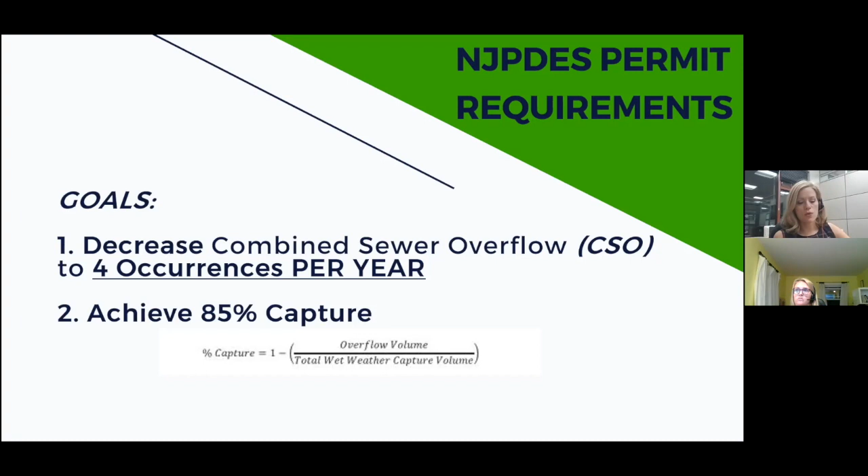The city's obligations in achieving those goals is to evaluate alternatives including green infrastructure - infrastructure that is environmentally friendly, named green infrastructure because it's able to treat stormwater runoff on site. It does not rely on piping networks that discharge stormwater runoff to the river.

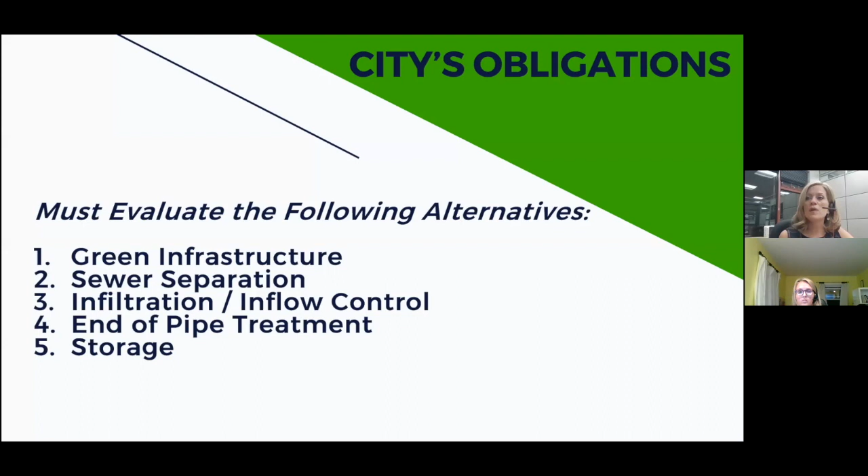Green infrastructure is something that the state of New Jersey is very strongly advocating for, because that would also help alleviate the rising sea levels and the climate change that we are witnessing. Sewer separation is another alternative, along with infiltration, inflow control, end of pipe treatment at the outfalls, and storage.

Now, the city of Hackensack sewer system areas - if you can see my cursor, these are the city limits of the city of Hackensack, and obviously the river is on the east side. The areas not highlighted in orange or green are already separated sections of the city. That's not to say there's no flooding there, but they're already separated. The stormwater infrastructure in those sections is connected to a stormwater conveyance system that finds its way to an outfall directly to the river.

Any sanitary sewer conveyed through those areas of the city goes directly to Bergen County Utility Authority, BCUA, for treatment. The areas highlighted in orange and green are the two primary sections that are still operating under a combined sewer system.

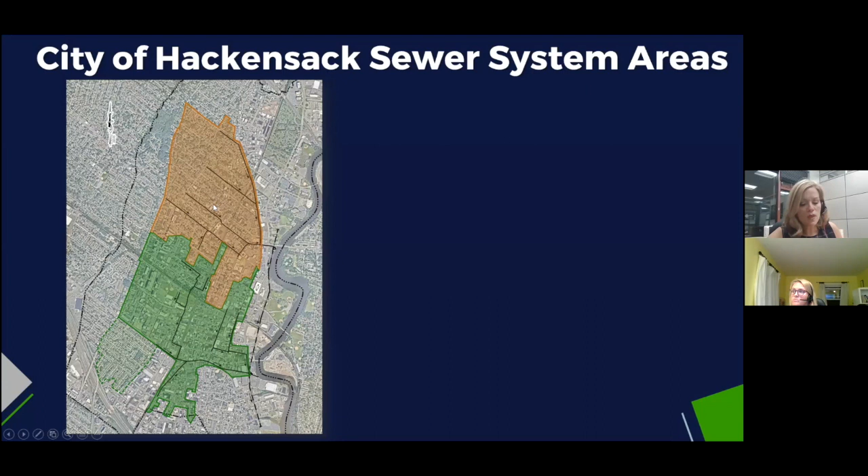The north side of the system is the Anderson Street drainage area, identified because the screening facility along this side is along Anderson Street, hence the term Anderson drainage area. The maximum flow this area captures is 4.9 million gallons a day. Currently we have 52 overflow events documented for 2020. Don't forget, the primary goal is to reduce our overflows to 4 occurrences per year for the entire city of Hackensack limits. Anderson represents 52 overflows alone up until now.

The southern section of the combined sewer system is known as the Court Street drainage area, and to Jim's point, it goes beyond the name of Court Street - it's the entirety of the southern region of the city, capturing pretty much 6.5 million gallons a day, and currently reporting 42 overflow events for 2020.

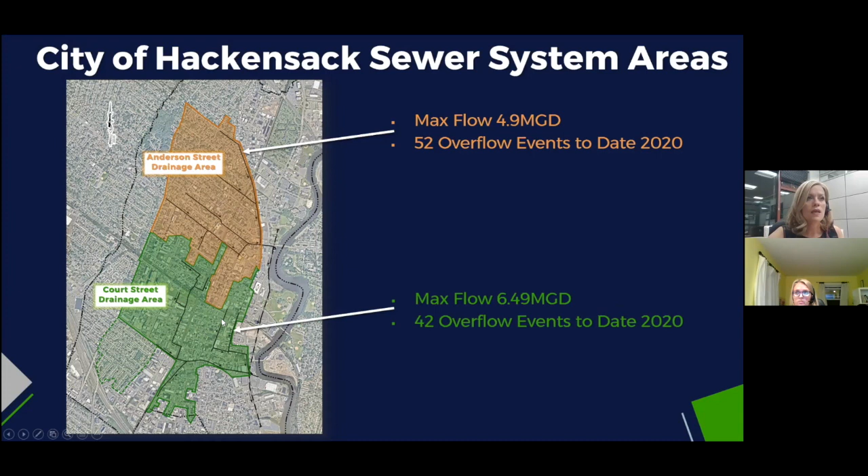Now, the objective of the long-term control plan is to minimize the combined sewer overflows that are being reported at the screening facilities. It is not intended to address flood mitigation. Its main purpose is to look at the current pipe network in the combined sewer system and how to further alleviate the overflows. However, addressing flooding and localized sewer separation efforts will address two things.

One is adding additional storage in the culverts that we are installing throughout the city in those specific areas. And it's also able to slow down the process by storing and delaying any discharge that makes it to the river without having it go through a combined sewer system.

I will now introduce Erin Abline to discuss the technical specifics of how we are outlining how we have come this far with sewer separation efforts, what we have done in 2020, and what we will be doing in future years to capture principal forgiveness. It made sense to discuss the technical backing of how we are outlining these projects to then come back and discuss the financial aspect and benefit to the city, which is also important, and understanding the reason why the projects are outlined the way that they are.

Thanks, Eleni. My name is Erin Abline. Like Eleni stated, I'm the project manager for Suburban for the city's current sewer separation projects. In order to understand the schedule alignment of these projects, I want to go through a high altitude view approach on what we're doing. Most of the city's flooding occurs within the Court Street drainage area, with two major areas.

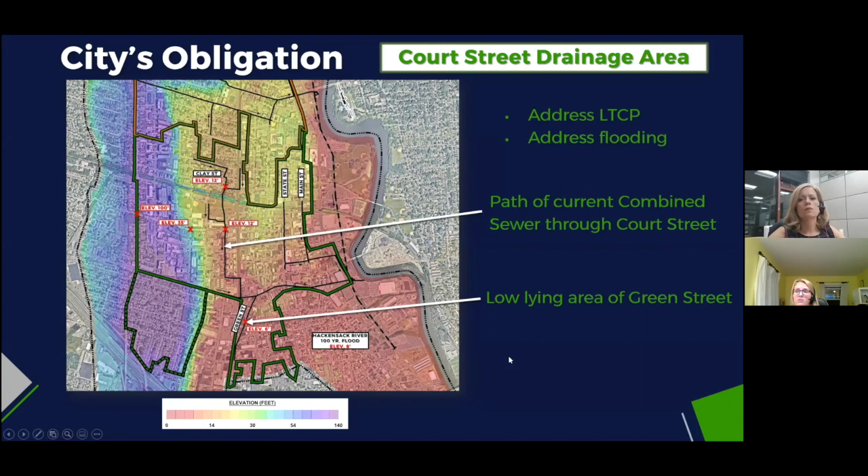To address this flooding, we need to continue efforts like we've seen on Main Street and cut off drainage area that comes towards Green Street. This infrastructure needs to be installed and run perpendicular to the river instead of parallel like you see right now. The next few slides, we're going to talk about the progress we've made so far towards this goal.

How it connects to our 2-year look ahead. First is the Main Street work performed prior to our involvement. The Main Street separation started with 2 projects designed by Boswell Engineering, shown on this map in yellow. The first was the separation efforts contributory to the outfalls behind White Manna. This infrastructure was designed to accommodate about 10 acres of separation, covering Main Street and State Street from Berry to Passaic.

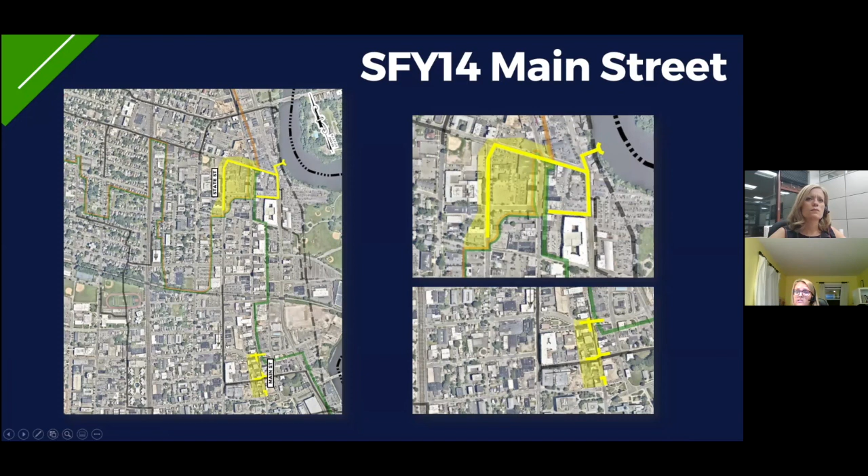The second was the separation efforts within the area of the city's TAP grant, or streetscape, along Main Street from Essex to Atlantic, which was designed to accommodate about 4 acres of separation and provide the conduits across Main Street prior to streetscaping.

Next are the contracts that Suburban designed. We credit the city for recognizing that Main Street played such a critical role in sewer separation and flood alleviation within the Court Street drainage area. You performed your due diligence prior to implementing numerous grants and loans for the Main Street two-way conversion and streetscape. This string of projects together, separation and streetscapes, represent $3 million of grants received by the city, which is substantial. Suburban was authorized to perform these analyses, and we've worked over the last year to implement a program.

With 2 separate contracts, shown here in red. The first contract, labeled Contract A, addressed the area between Atlantic and Mercer Street. This area is about 7.5 acres and is contributory to an existing stormwater system and outfall through the record site. The second contract, labeled Contract B, covers a much larger area of about 26 acres, delineated by Mercer to Berry Street and from State Street to Moore Street.

This contract's drainage area is contributory to a large culvert currently being installed on Camden Street. A culvert is loosely defined as a significant drain under a road or railroad. The culvert installed within Camden, shown here for scale with a person standing next to it, is used for both conveyance and inline storage.

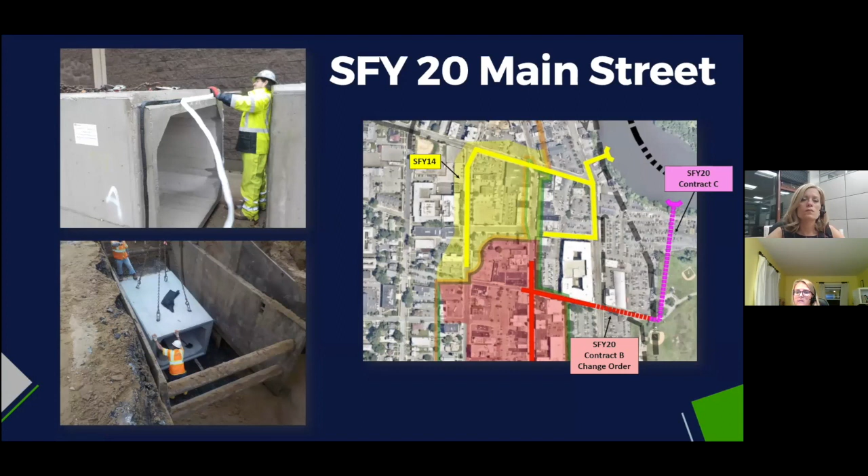I think it's important to note that the work done to date, if you look out here, we've separated about 10% of the stormwater that is contributory to the combined system within the Court Street drainage area. And that's substantial. That's helping Green Street today. That's helping Clay Street today. It's helping all your areas of surcharge already.

So Eleni, if you could just go back one more, I want to highlight why Clay Street is an issue and why it makes sense that it's the next area. There's two rails that intersect, and this creates a bowl, where this water you see in these low-lying areas in red has no way to discharge except for added infrastructure.

That's about 30 additional acres that will go through the Camden culvert. I credit the city for having the foresight to perform this due diligence and analysis to set this up to grab this additional area. After installation, this area for the 25-year storm will be dry, which will also alleviate all of that area going to Green Street.

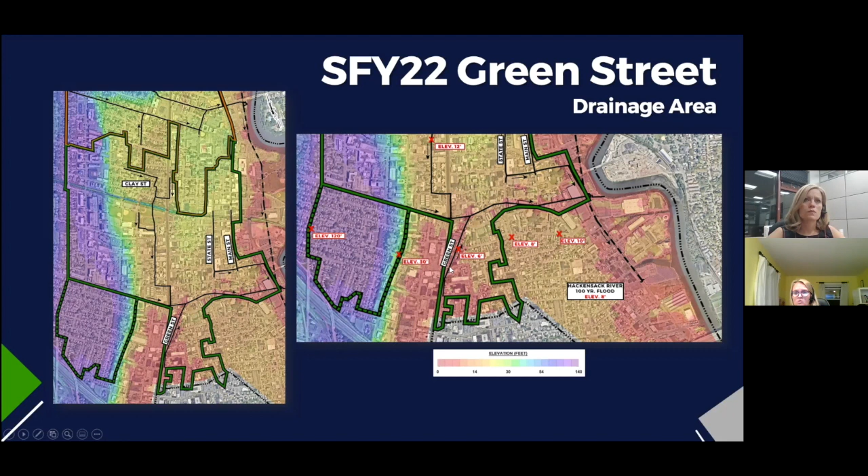So switching gears to the finances of this, I wanted to introduce you to, well, you are fully aware of the New Jersey Water Bank Financing Program, particularly the Clean Water State Revolving Fund. I just wanted to make sure everybody on the council is aware of what that acronym is when we say CWSRF. Clean water is actually the water that needs to be cleaned.

Safe drinking water is safe drinking water. So when we say clean water, it is actually for sanitary and stormwater projects. It is a federal fund source for the Federal Clean Water Act, facilitated through the DEP and financed also through the iBank, the infrastructure bank.

The Main Street sewer separation effort started within the city of Hackensack 5 to 7 years ago. The first principal forgiveness project that the city received was the one we discussed earlier along Main Street, previously designed by Boswell.

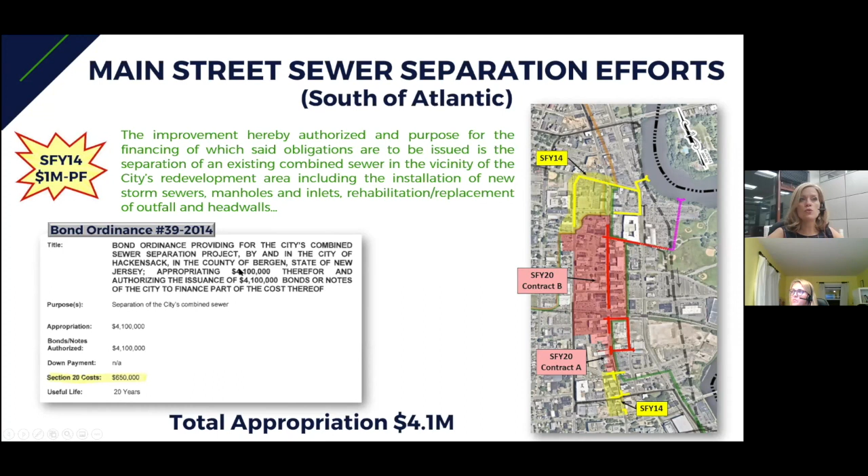So state fiscal year 14, the city received $1 million of principal forgiveness for these project efforts. And the bond ordinance that appropriated funds for that was introduced and adopted in 2014.

Now, since then, through state fiscal year 2020, I wanted to underline that the state fiscal year operates July 1st through June 30th, not a calendar year. The balance of the books that Jim is doing, the reappropriation of funds, the transfers of funds, the year-end budgets end in December for the city and many municipalities in the state of New Jersey. However, the state fiscal year operates July 1st through June 30th.

The reason I say this is because we are already 3 months into state fiscal year 21. So I want to make this distinction when I discuss state fiscal year 2020 for Main Street. That was essentially the project we have constructed and are currently completing along Main Street, state fiscal year 2020, and the cutoff for that was June 30th of this year.

For CSO abatement, the program was offering $1 million of principal forgiveness, and Main Street is aligned with those timelines and regulatory requirements. We are already in the program receiving reimbursements for Main Street sewer separation, and we'll attest to that - we received the first wire transfer just a few days ago. For state fiscal year 20, we have a total of $8 million appropriated for the sewer separation along Main Street.

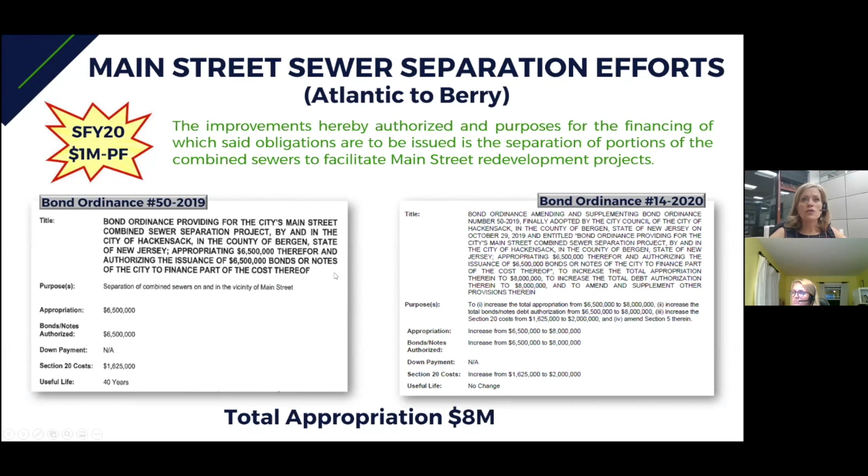The reason I say that is because when we designed the project, we had anticipated that the stretch from Atlantic to Mercer and from Mercer to Berry would be in the tune of $8 million. And that includes the culverts that we have added along Demarest and along Camden.

Now, in doing this and going out to bid during COVID, if you recall, we worked through the first virtual bid solicitations. We had our bid opening in the parking lot with COVID. And it really paid off because the contractors were very competitive in their pricing, and we were able to secure

record low pricing for our project. So even though we appropriated $8 million for just the stretch highlighted here in red, we're in a position where the bids we were assuming would be $4.2 million just for contract B alone. And again, contract B is the one I'm showing you here. Our engineer's cost estimate was $4.2 million, and it is tiny print right now because I wanted to give you a zoom out view of 5 bids that were received.

These bids spanned across $2.5 million to $4.1 million. 4.1 keeps our estimate honest, that is something we would anticipate to see, but due to COVID, the numbers came in lower and lower and lower. The biggest ticket item in contract B was that culvert that Aaron mentioned along Camden. It took a lot of planning and hydraulic analysis to identify what size culvert we would need to facilitate the proper storage and conveyance of stormwater that would be able to capture more from upstream locations.

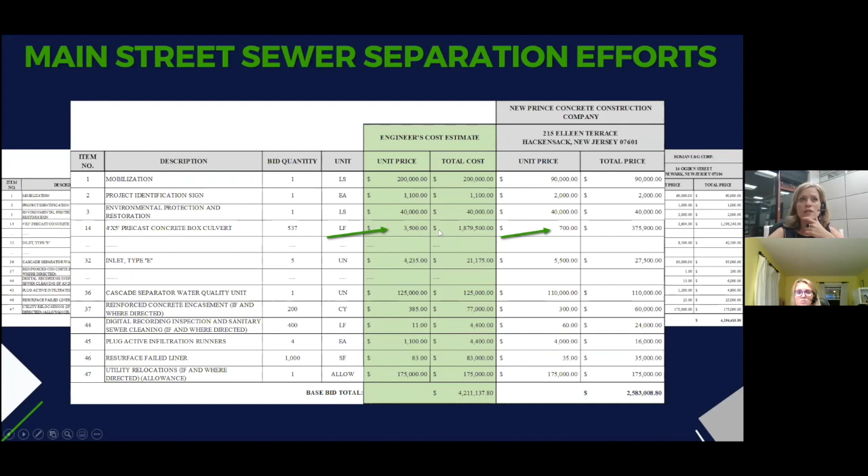Our engineer's estimate was $3,500 a linear foot. The apparent low bidder had $700 a linear foot. That is a significant price savings. And every other contractor that came in, their prices varied tremendously across the board, as much as $2,600 a linear foot. So if we have an apparent low bidder going at $2.5 million, it behooves the city to take advantage

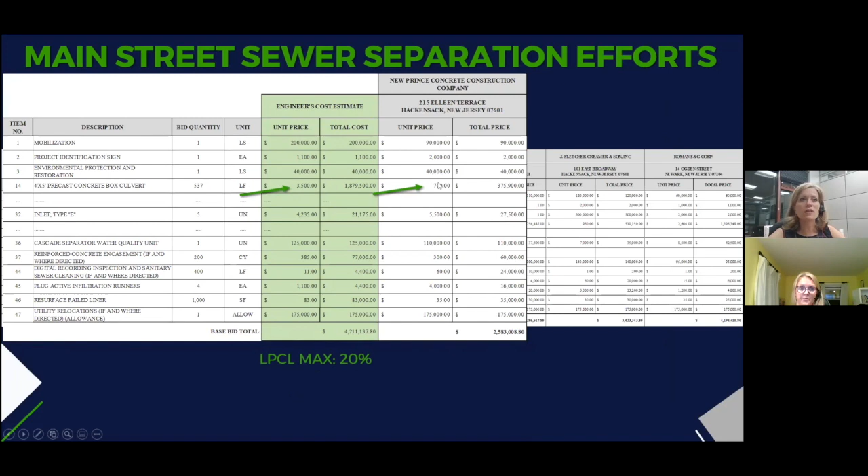of the local public contracts law maximum amount that we could use to get as much of this culvert at that price. So at 20% of the apparent low bidder amount, the revised contract amount could go as high as $3 million, leaving us with $500,000 more to do as much of this culvert as we can downstream from Main Street.

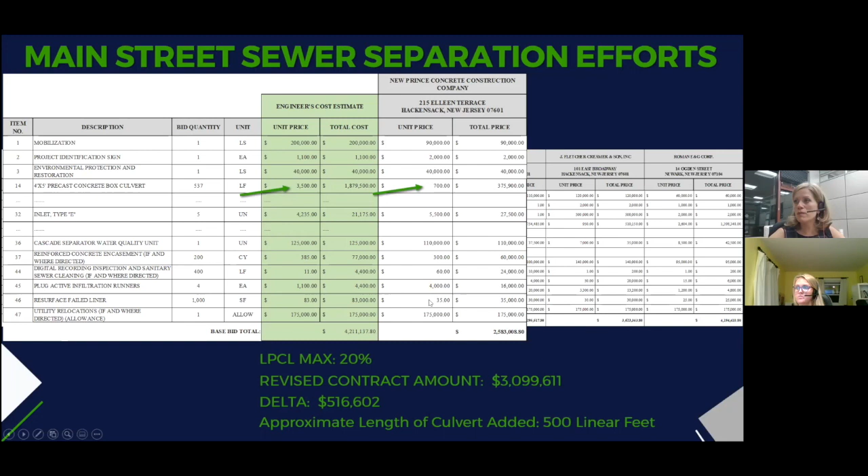So what you will see here, and the reason for this whole presentation, is to also prepare you on change orders and proposals you will see for design and execution of construction. We are going to recommend to the city a change order for New Prince to extend the price, the culvert, as much as possible as allowable by the local public contracts law, so that we can have as much of

that extended with that unique low price. We're also going to present you a proposal for a third contract that would then increase the size of the culvert to the river and increase the existing outfall to be able to facilitate all of the additional stormwater it's going to receive.

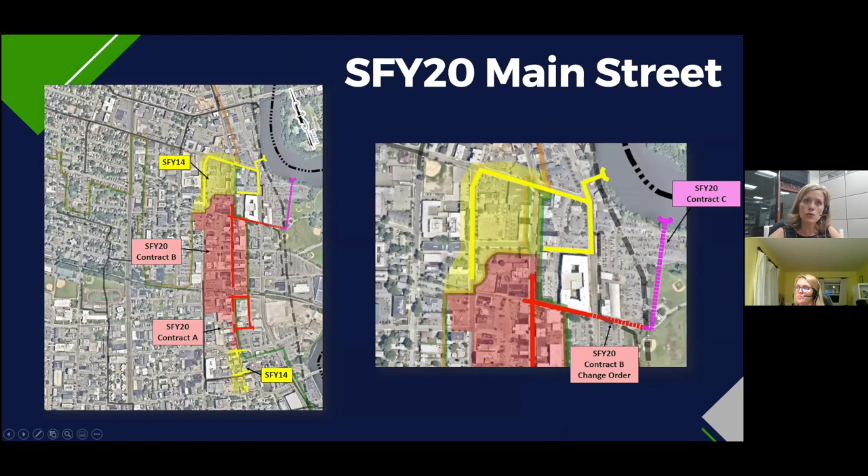Just to put your minds at ease, the total appropriation is $8 million for these efforts. Our current total of costs to date is $6.2 million, and that includes the increase of contract B to extend the culvert as much as possible. We have $1.7 million available to us to maximize the appropriation and bring the culvert all the way to the river in the adequate size that it needs to be.

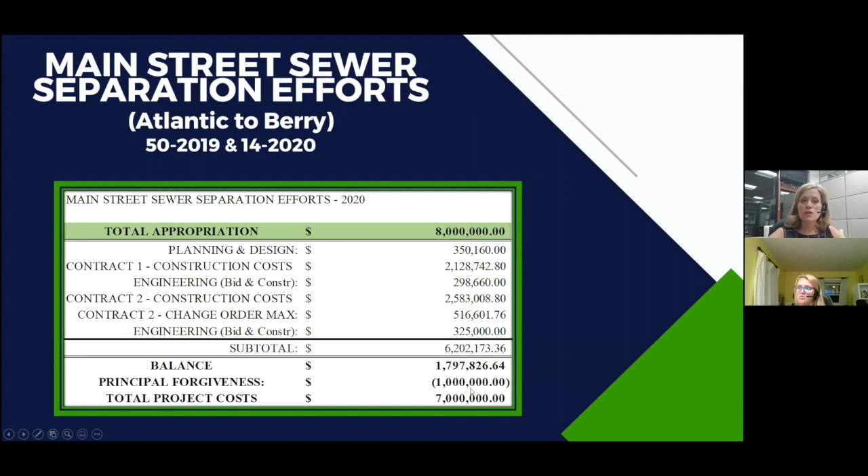So the balance is pretty much adding up to the full $8 million, not forgetting that we're getting $1 million of principal forgiveness, and the total project costs will be $7 million.

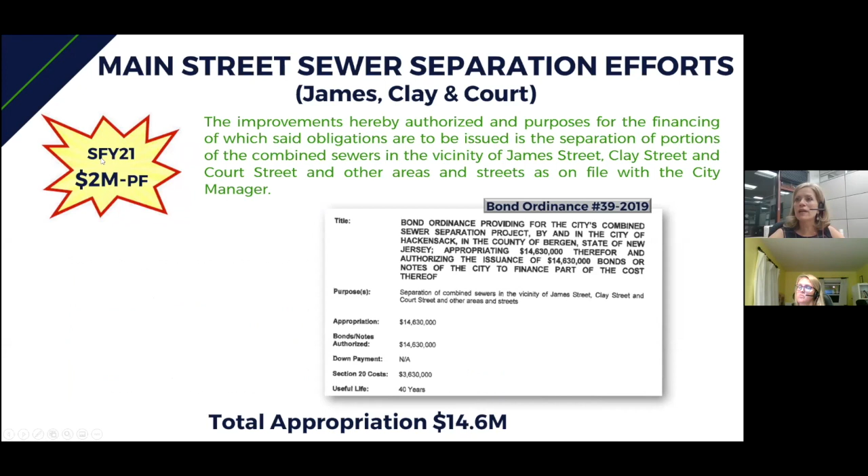And finally, the Main Street sewer separation efforts along James Clay and Court is what's better outlined for state fiscal year 21. Now the program has improved and is allowing $2 million of principal forgiveness for projects that are for sewer separation efforts. And it's essentially paying for 50% of the total project costs to a maximum of $2 million principal forgiveness.

So when we're looking at that for sewer separation efforts, it is very important that we look at a project that at a minimum is a $4 million project. So CSO sewer shed, gray and green infrastructure, $2 million principal forgiveness maximum.

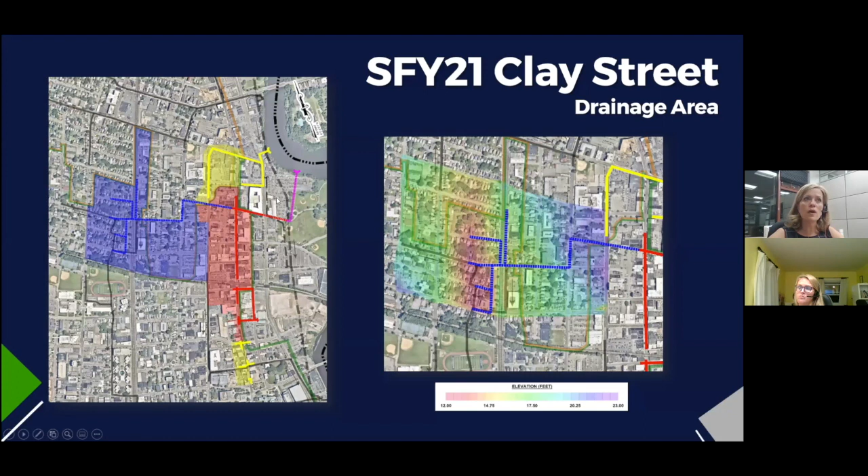So that is what we're looking to address. And as Aaron pointed out, state fiscal year 21 will be this one upstream of what we were discussing earlier, just closing the loop on having this whole system addressed appropriately. Final word is that it is a regulatory requirement that we prove that going through the program is indeed the most cost-effective manner of addressing these problems and issues.

Through the WISE calculator and putting in the comparative funding and financing ability from the city, if they were to go through a traditional bond market rate, for a $7 to $8 million project, you're going to be looking at $11 million worth of financing costs versus only $9.5 million going through the iBank. It really represents significant savings to the city going through this program, notwithstanding an additional $2 million of principal forgiveness as well. That concludes our presentation.

We wanted to cover a lot of groundwork here. If you have any questions, feel free to ask Jim, he knows all about this. It's a pleasure working with you, and it's very rewarding to see the city succeed through this program, with small victories along the way. We feel very happy about the progress of these projects so far.

Good evening, everyone. My name's Eliot Benman. I'm with the Voorhees Transportation Center, Rutgers University, which is a partner in the Together North Jersey initiative. I'd like to thank you for the opportunity to present on the Demarest Place Community Vision Plan, which we worked on with the Northern New Jersey Community Foundation and the city from December of last year to July of this year, with the plan making recommendations for turning Demarest Place into a vibrant public space activated through the arts.

And this builds on efforts going back three years, previous efforts by the Community Foundation, Main Street Business Alliance, Hackensack Creative Arts Team, and the Community Foundation's Artsbergen initiative to do public engagement, introduce music and art to the Main Street area, and put up the mural that is currently in Demarest Place.

Together North Jersey is a coalition of partners working to promote sustainable development in the 13-county region. The initiative is funded by the North Jersey Transportation Planning Authority. One of the ways we foster sustainable development is through our local technical assistance program, through which the Voorhees Transportation Center at Rutgers provides technical assistance services to support local initiatives that advance the vision of the TNJ plan.

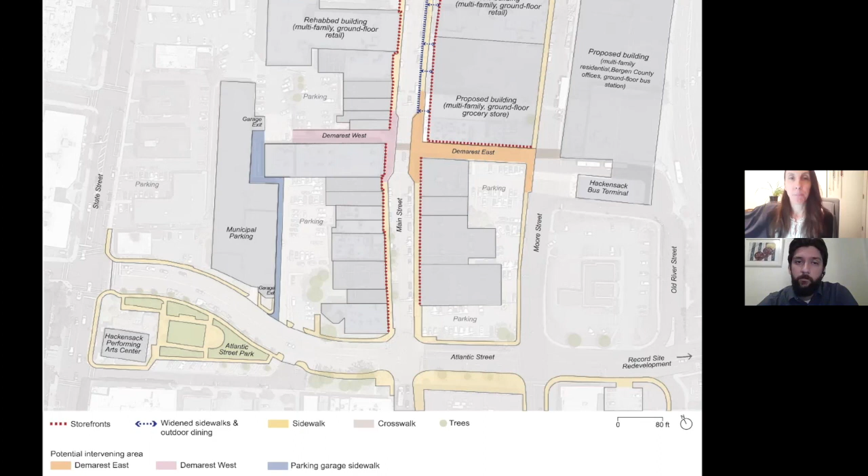So we wanted to create, working with our partners in Hackensack, a community-driven plan for Demarest Place. We reached out to hundreds of residents, visitors, business owners, and employees working in the downtown through intercept surveys and questionnaires, at HackPAC and at Bergen Community College.

We were also going to do on-street outreach, but then COVID-19 hit and we moved things online. We did have a really terrific virtual workshop in partnership with the Hackensack Creative Arts Team, where we spoke with members of the local arts community, and they offered up their ideas for Demarest Place. We also held discussions with the Main Street Business Alliance, as well as developers in the area, to see what their priorities were.

So from that outreach, we distilled 4 themes that we thought should inform any future designs or activation of Demarest Place. First and foremost, we heard that it should be a space of inclusivity, a place that expresses the rich cultural diversity of the Hackensack population.

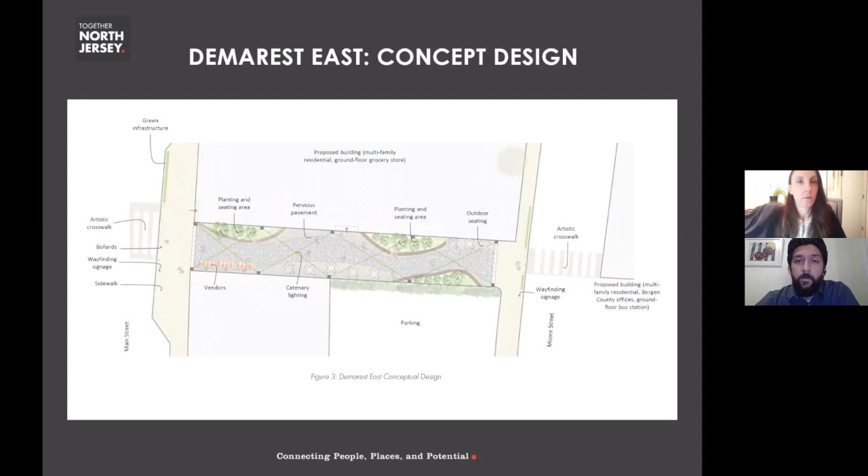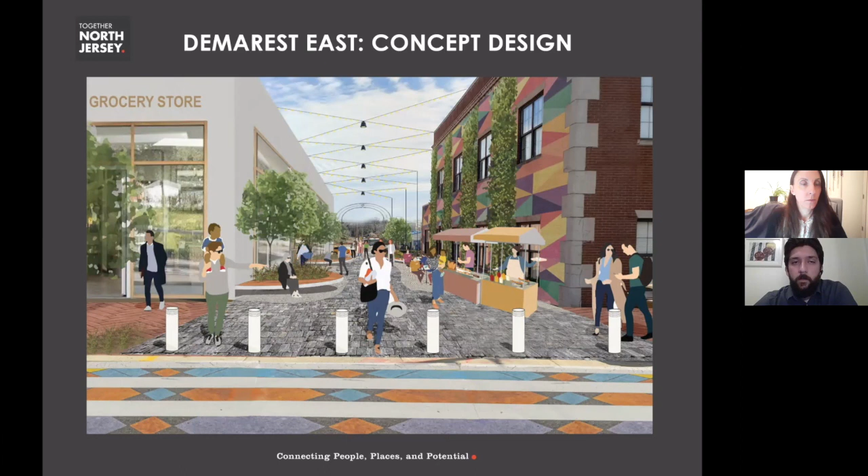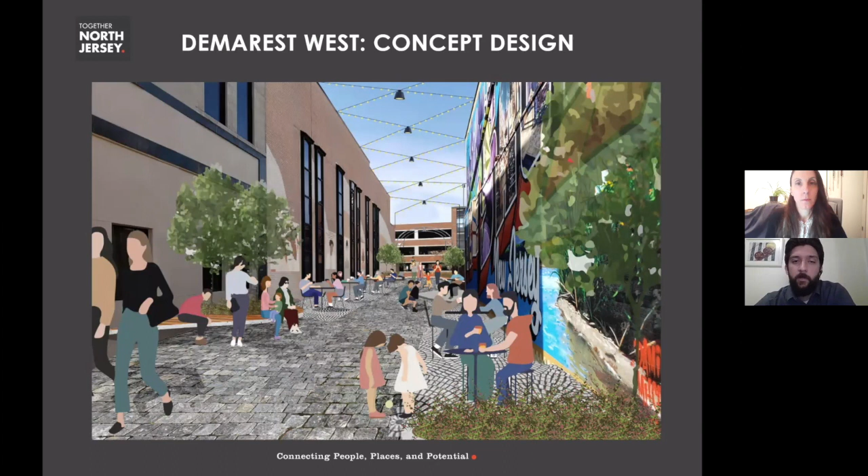And the project report makes many recommendations for activities that could take place in the space. You can see examples here, but again these would be largely pop-up stages, pop-up art installations, games, sidewalk art, and local vendors.

I'd just like to note that amid COVID-19, communities are really discovering the power of vibrant public spaces as they work to foster safe community life. So Demarest Place is really an important asset in that regard, and a lot of the recommended activities in the report can be carried out safely in present time amid COVID.

So that's a very brief overview of the work we did over about 6 months or so. The entire report can be found both on the TNJ website and the City of Hackensack website. I'd like to conclude by saying we had a terrific experience working with the Northern New Jersey Community Foundation and the redevelopment team in the City of Hackensack putting this together, and we really hope some of our recommendations get advanced toward implementation.

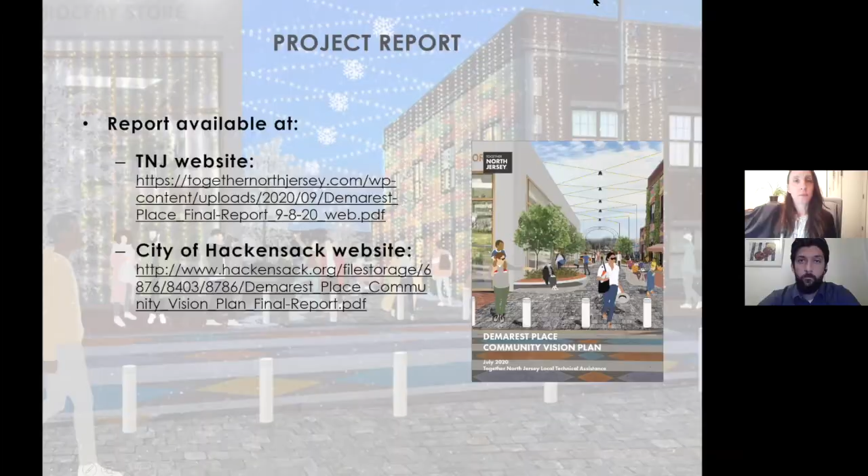Let's move. Next on the list is the administrative search warrant ordinance before you tonight, put together through the cooperation of our municipal prosecutor and Steve, primarily to address property maintenance issues and facilities or addresses of property that need to be inspected. Obviously if the property owner schedules it through the construction office, they know we're coming, they clean it up, and we kind of waste our time doing this. With the search warrant ability, we could show up on scene unannounced and address the conditions or housing issues that are facing, which usually challenge police, our health department, and community issues, and everything from homeless people to transients.

May I, City Manager, for a moment? Sure. I just want to point out that right now the city does have the ability to go to the municipal court and obtain an administrative search warrant. It is within our authority. The ordinance is more designed, I would say, to add additional enforcement mechanisms by stating that a failure to cooperate with a validly issued search warrant...